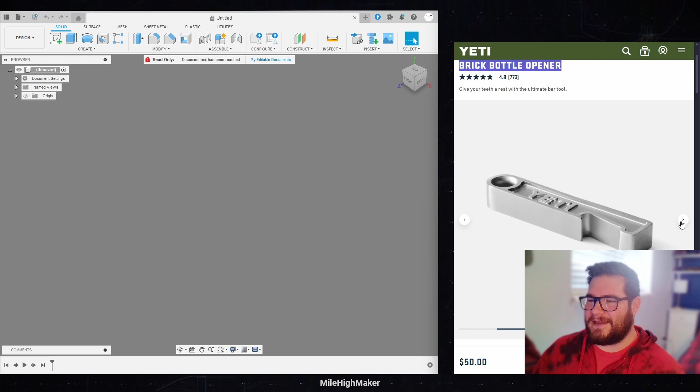All right, so here we are. I have found a Yeti brick bottle opener. Lovely name, by the way, I love that name. But look at that, it's a brick, this looks dope. I want this. Do I want to pay $50 for it?

I mean, kind of. Okay, so let's jump over into Fusion 360 and create our own custom things based off this. What we need to do is start by creating some parameters. I'm sure you can do this in other programs, but this is my process for Fusion that I've found works.

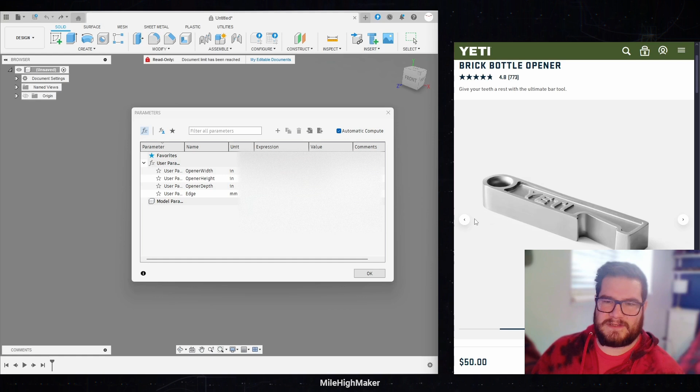So we're going to call this the opener width, and we're going to change that to inches. The other thing I want to add is this edge right here, so I'm going to call that edge, and we're just going to guess how many millimeters -- I think it's like 3-ish. Going to add that. There's also this cutout, this inset, which looks about the same size, so I'm going to use the edge value as the cutout depth. But I think that's pretty much what we need to start with for now.

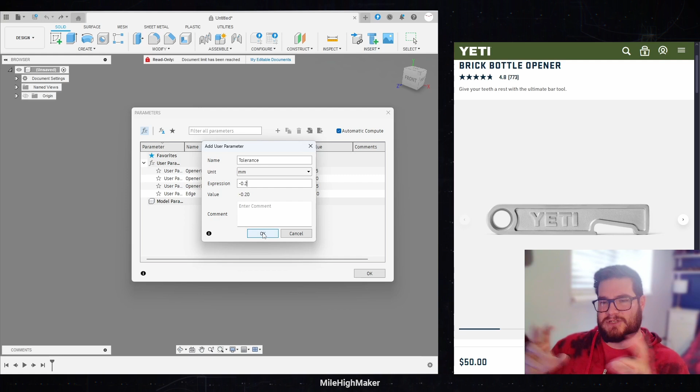I also like to add a tolerance, but for this one, the multi-material part, we'll get into tolerances later -- I'm actually going to do that in the slicer instead of here. Normally I'd like a tolerance of minus 0.2, so that way if I create something, I know I need to shrink it by 0.2 so that parts can fit together on my printer. So I'll usually add that to my parameters as well. But that is a good starting point.

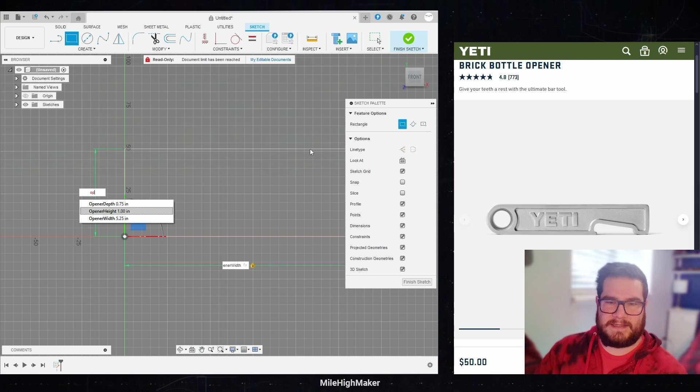All right, so let's go ahead and create a sketch. I'm going to put it on this face right here, the front face, just because that is what I find to be the print bed. When I bring my prints into Cura, that's where the print bed is going to be, and so we want to create this lying on the print bed. Let's give it a base sketch, basically just to get general parameters for our reference. And this would be the opener height. That side -- so that is where our stuff is going to live, everything inside of there.

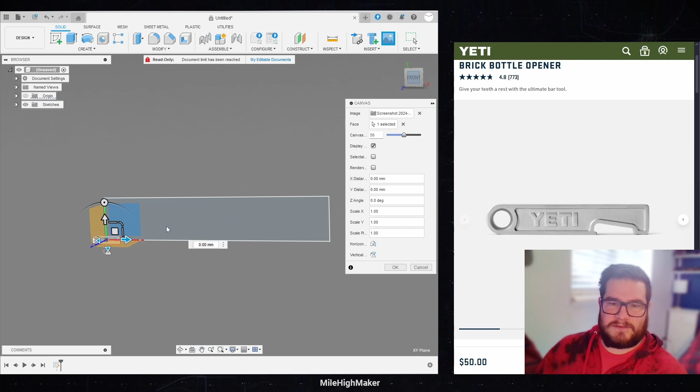And the first thing we're going to put in there after we finish the sketch is a canvas. This is basically just a screenshot of this, which I've already clipped out. So we're going to stick it on that same face -- you can click and hold to put it on that face right there. And we're going to scale it until it fits right inside the rectangle. That image is a little hard to see, but we're going to work with it. It's about where it wants to live.

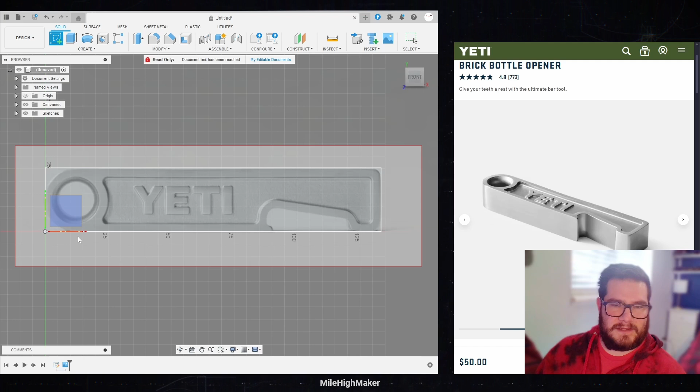All right, so we can start designing our stuff. I'm going to create another sketch. That's basically just how we can set up general parameters so we have somewhere to work with in the correct dimensions. So that rectangle is there for the picture, then everything else is going to be our actual design. All right, so we created another sketch, we're going to put it on the XY plane, and move it over.

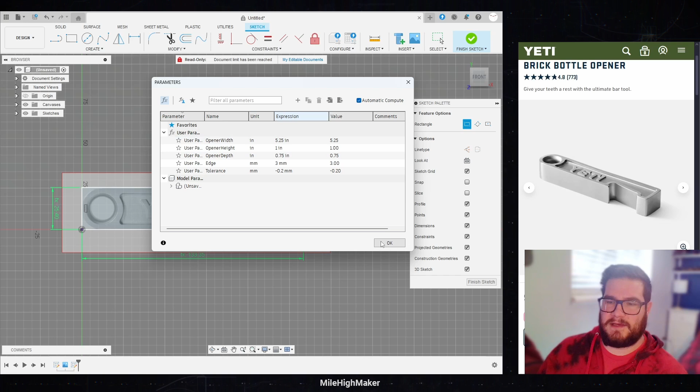Okay, there we go. All right, let's start creating another rectangle because that'll define most of our opener. So this would be the opener width, and then you can tab for the opener height. And so that is referencing our parameters, pulling these numbers. It's handy to have these because if I wanted to make this a much longer opener, it would automatically update over here, and everything that's constrained will actually follow unless it's broken. But we're not going to worry about that right now.

So we're just going to create a circle, which is going to be this back edge right here. And what I like doing is tangenting that to my edges, so that way this will always follow the size of your square. All right, so let's get this angle right here. It looks like it's pointing basically where this edge meets the wall, that's where this angle is going to go, or start anyway.

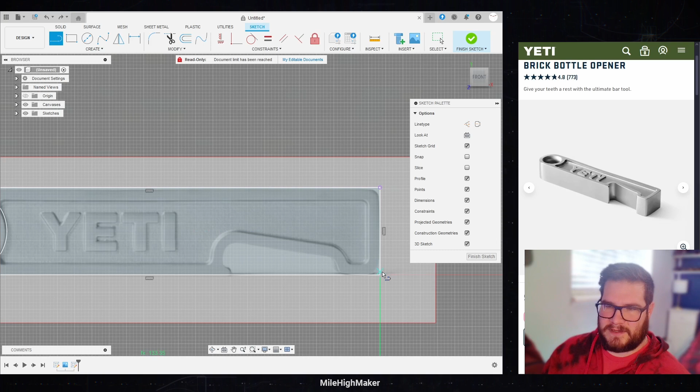So we're going to make that an edge height. And this isn't going to be a Fusion tutorial, so follow along as best you can if you're in Fusion or another program.

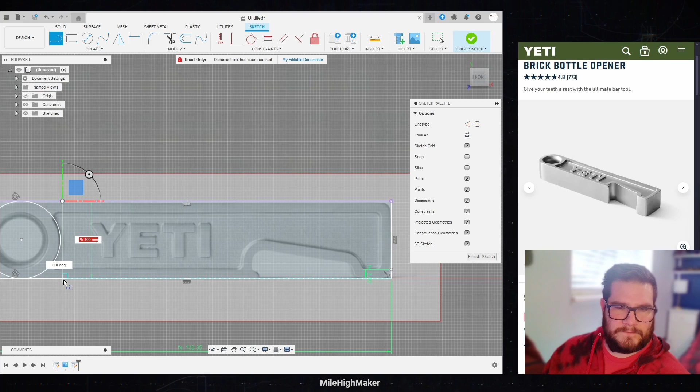But if you're an expert, you already know what I'm doing. Another thing I'm going to do is, where is it going to end? It looks like it's going pretty much the same place, but over here let's see, we're going to do something. It doesn't have to be perfect because we can change it how we like, but I'm going to tangent that circle. So basically, we're going to have the edge corner right here be the endpoint for our curve. There we go, and that's pretty close.

I'm good with that, and then it looks like it ends somewhere around here. So this will probably just be a sketched dimension at a set size. It doesn't have to be perfect. Let's make it like a 13. 13 shows up in so many designs I find, like the number 13. Plus it's like a dope number, so one of my favorite ones anyway. Not that you needed to know that, but we're going to do that. And we're going to set this dimension.

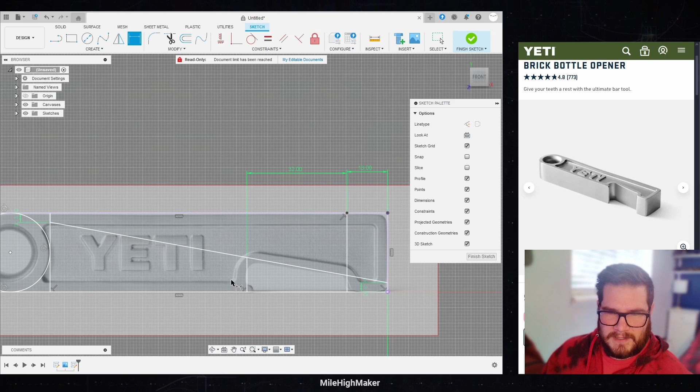And I have already looked up what a bottle cap is. Like the dimensions of a bottle cap is about 32 millimeters. So we're going to set that to 32 millimeters. And you can see that little lip right here. That doesn't quite go up as high as this, but we can make it do that. So that, create that little bump out there. We'll tangent it to that corner.

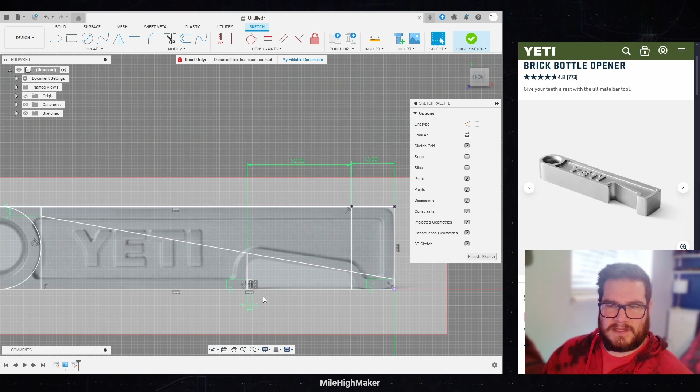Do edge divided by 2, edge divided by 2. Okay, looks like it might need a little more, just edge height. So that way, in a later process, when we start getting this part right here, this little outer groove, we can actually match it up to that.

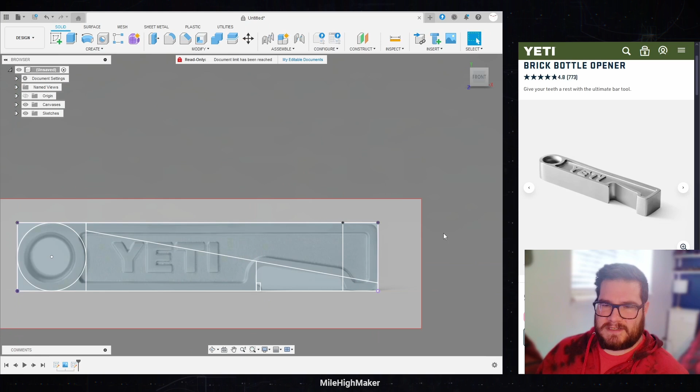So I think that's pretty much it to start with. That looks pretty good, we can start from here. We can start extruding and beveling and chamfering to our heart's content. All right, so let's finish that because we have that little cutout and we have that whole thing, and we can always poke a hole.

Cool, we are ready to start extruding. Let's look for a different view. I've hidden our first sketch, and let's start extruding. Let's see, we don't need those bits, but we need pretty much everything else. So you can select everything, but we can also just click and drag and say no thank you to those bits and no thank you to that bit.

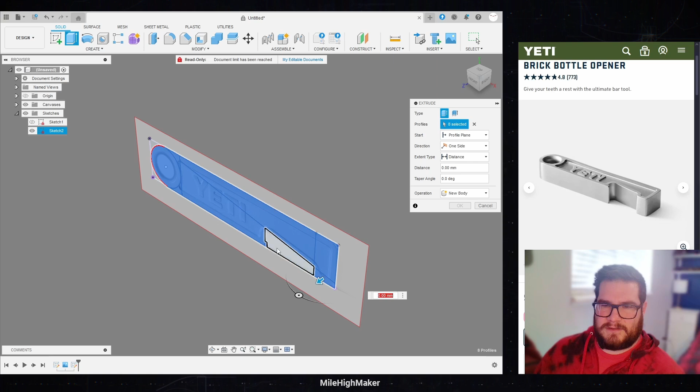Cool, and the depth of this is 0.75, but we're going to half that because later we're going to mirror the groove so I don't have to do as much work. Alrighty, so I'm going to bring that sketch back up.

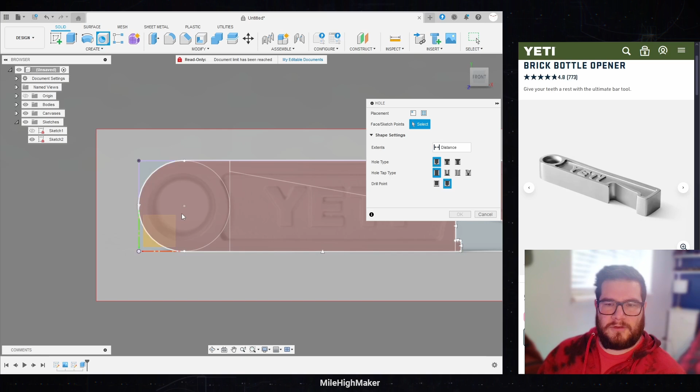Okay, so let's now poke that hole right there. So we're going to create a hole. We're going to say it's in the middle of that sketch. Let's say it is the height minus the edge. There we go. Yes, so that's the hole size I want.

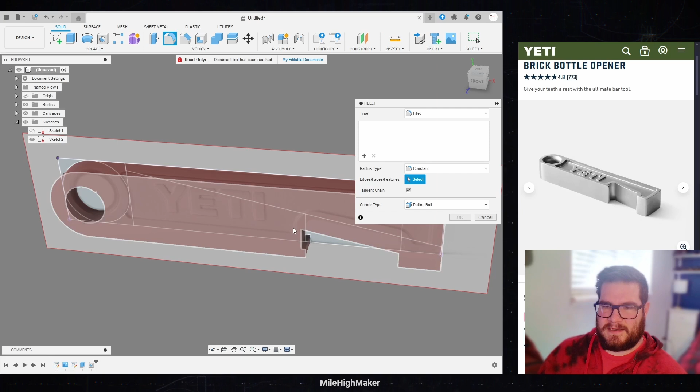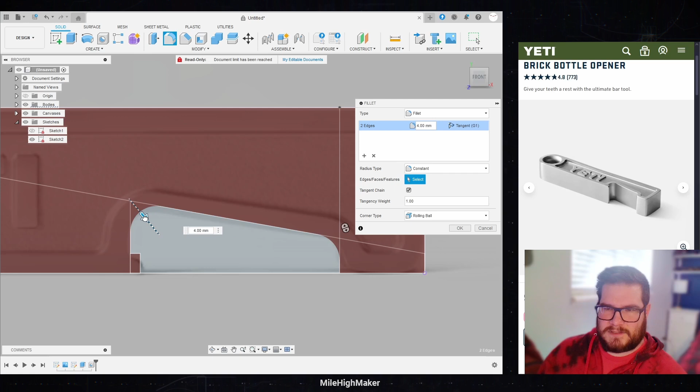Cool, okay, so now let's create some fillets to get that nice curve here in the bottle opener section. All right, and this one's kind of cool, actually. I'm going to start here and here on those corners. Stop it, there, on those corners. And we can start dragging to kind of try to match that edge. It's too much, about a 4.5, no, too much. Here we go, 4, yes, that's a nice curve.

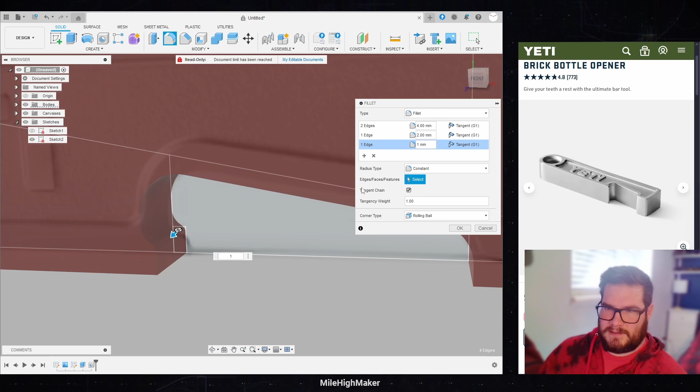Let's add another one. And what I found is actually as you go down this edge, they started with a 4, and then it goes to like a 2, and then it goes to a 1, and then it goes to a half. So they halved the curve every time. Let's see if we can see that a little better, hidden edges.

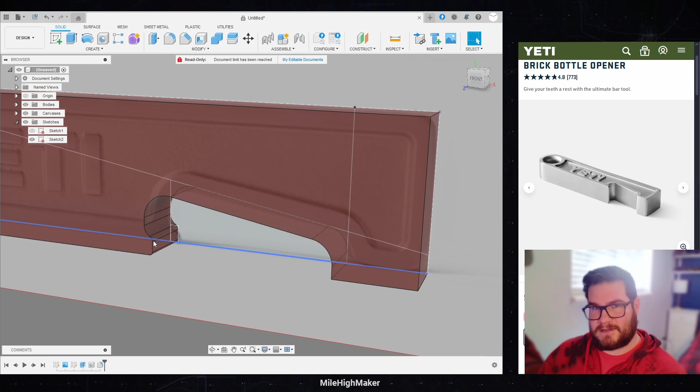That looks really nice, they halve that curve every time, and that looks really cool. So that's something I'm going to take into some of my next programs, my next models, is taking those rules where, oh, start with a big curve, halve it for the next curve, halve it for the next curve, halve it for the next curve. So as you can see, we've started here, 4, 2, 1, half. That's pretty nice, good job designers. So since that one's a 4, I'm going to add one, hit Control, add that corner to the 2.

And we're also going to do it to these ones as well. I think those are also 2s. Yeah, those are some nice 2s. Good, good. That looks beautiful. I'm going to hide that sketch. We're going to hide the canvas for now, because I think from now, we're just going to kind of eyeball it, because that looks sweet.

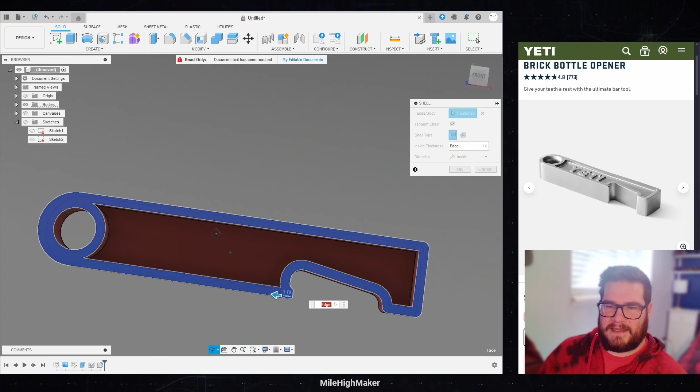All right, so now we can start creating a shell, because we want that edge around here. And that edge, we'll just type in the edge. Oh, look at that. We're already looking great. It's a little deep, but that looks really nice. Okay, so, yep, we're on it on the inside. Just leave it as is.

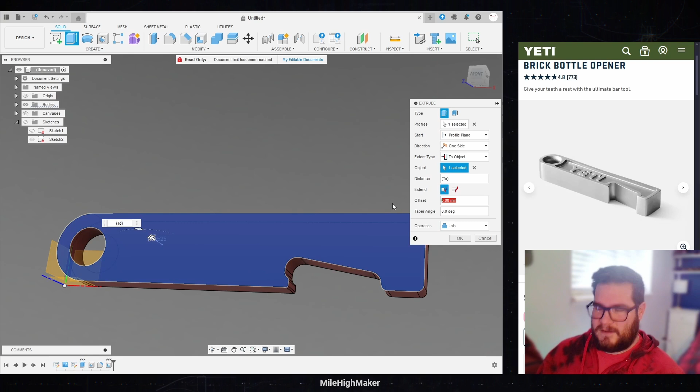Okay, so now to fix this back to the height we want to extrude this lower plane down here. And we want it to be a specific distance from that top face. So we're going to go to an object, say this top face, and the offset is going to be minus the edge. So now your edge height is exactly the depth of that. And we're going to say join. Yep. Great. So that is half of our model right there.

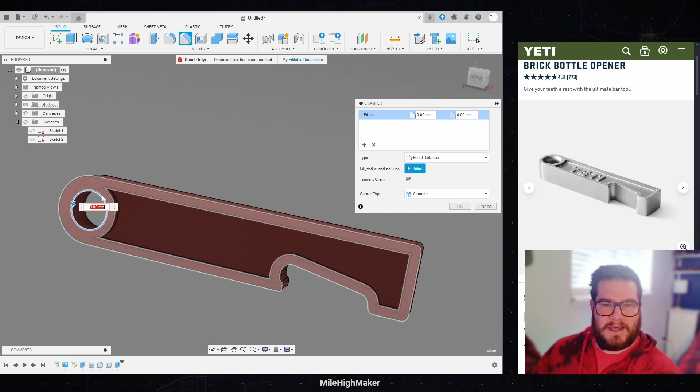And we can do some extra fun stuff. You can see there's a chamfer and a bevel over here. So we're going to add both of those right now. So we're going to start with the chamfer. I would say let's do edge. Let's see. That might actually be a little deep. Let's do edge divided by 2. Yeah, that looks...

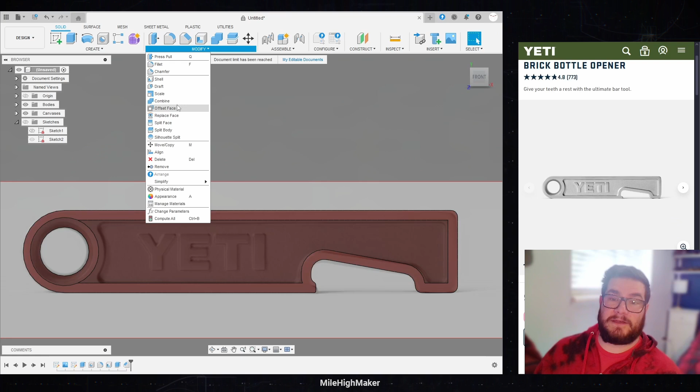All right, cool. But I don't like this right here. I think we need to make a thicker edge. Let's bring our canvas back up. Yeah, it looks like the edge could be a little thicker. So this is why we set up parameters, because we just change the parameter. Say our edge is now going to be 4 mils. Awesome. I'm going to change that to actually be half an edge.

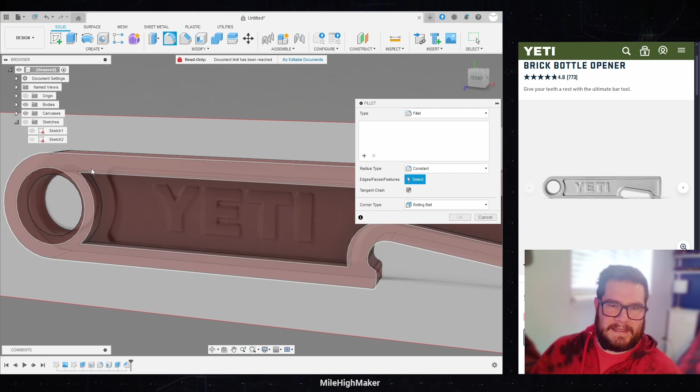Yeah. Okay. We also need to get this inner curve right here. You can see on the canvas those inner curves. So let's create another fillet. Select all those harsh corners. Nice, nice, nice. And let's see. It's probably going to be a 1, or it might be a 2.

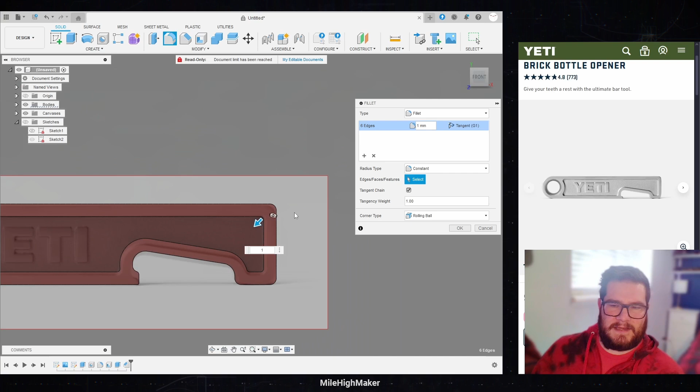Looks like a 1.5, but I think we're going to make it a 2. No, we'll make it a 1. Yeah, we'll make it a 1. I like that. Make it a 1 mm, because we had the 2 on the outside. Half of that is a 1. We're learning. This one, ooh, I might change that one. So let's change that one to be a 2.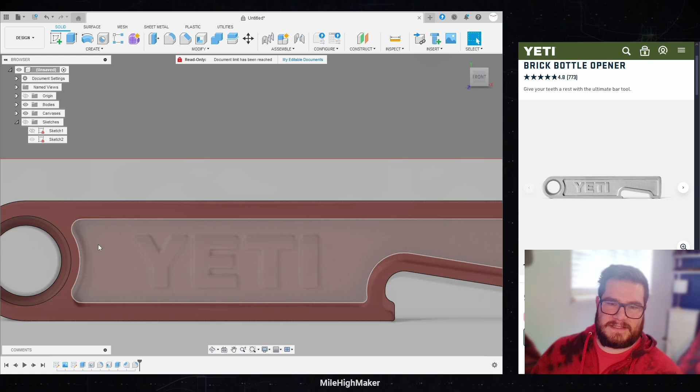So we'll unselect those. I'm hitting Control to unselect. We'll add another selection. Click those 2. We'll say it's 2. I mean, we could set up parameters for multipliers and just multiply it by something, but I think I want a sharper curve in here than they have, and about the same right here. I like it. Cool. We can move on from there.

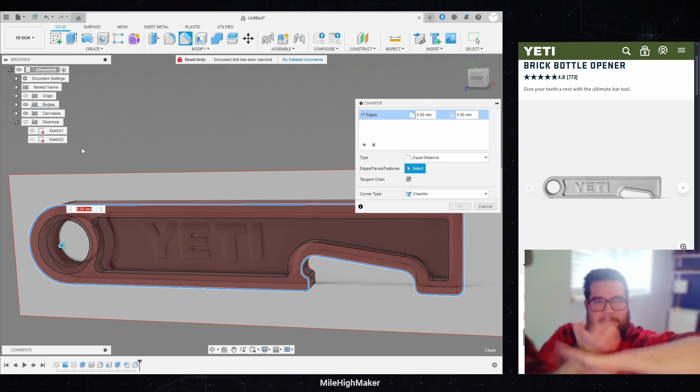Let's create another chamfer over here, because when you are printing stuff, this is also going to be on the back side. You don't want to have a bevel that's sitting on your build plate, because that soft curve is going to look terrible and chewy. So you want to start with a chamfer and then bevel that. So we're going to do that. So a chamfer, then bevel.

So let's see. We'll take our rule of halves. We'll start with that 0.5, because we had 1s, and we're going to do it half. Might as well. And we'll give it to this side as well. Or actually, we're not going to do it to this side, because I want to set this up as a multi-material print. And so I'm going to stick something in there after I've customized the name. So that'll be something we'll work on later.

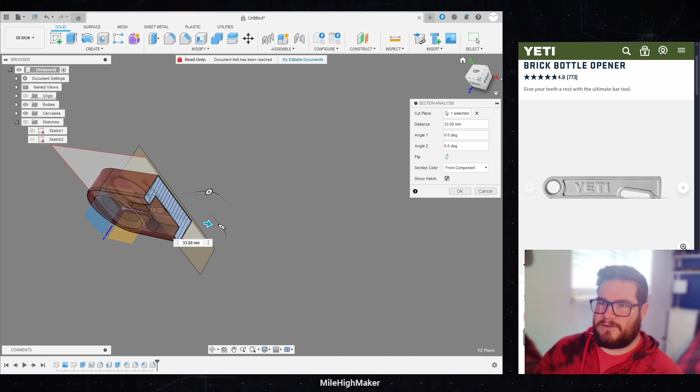So let's give it a fillet. And do here. And we're going to give that another 0.5 millimeters. I don't want that. 1? Yes, 1's good. Cool. So we'll finish that. Let's do an inspect, and we'll do a section analysis, so that way we can see exactly what that is doing for us. So look at that. So that's going on the build plate, and then you chamfer it and then fillet it.

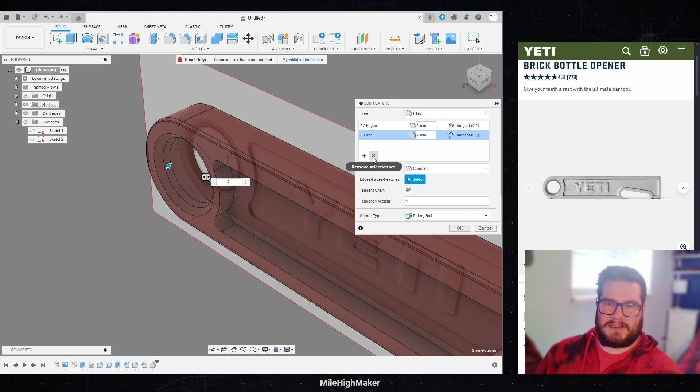Looks good. So that way it doesn't have a soft overhang that gets messed up. Cool. All right, back over here. Let's bring this up again. We'll add another fillet right here. Is that a 1? Oh, that looks like a 2. That's a good 2. Cool. So I guess we're sticking with 4s, 2s, 1s, and halves millimeters.

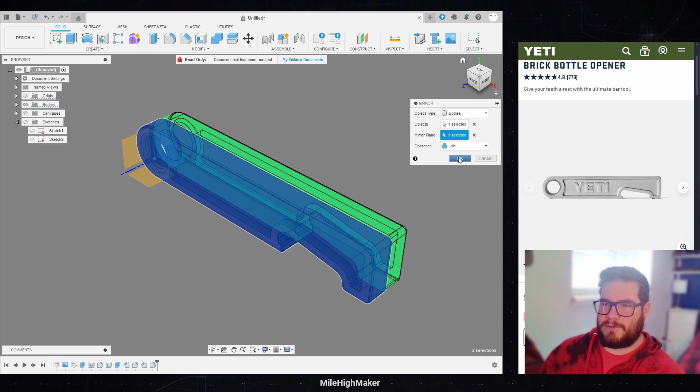The millimeter dimensions. All right, so now let's create the mirror of this, because this is pretty much done to this point. Don't need the canvas. Let's create a mirror of this body. The mirror plane is going to be click and hold the XY plane. Oh, look at that. Yes, we want to join it. Oh, yeah, that looks great. We could be done here, but we're not going to be. We're going to make it even spicier because this is getting good.

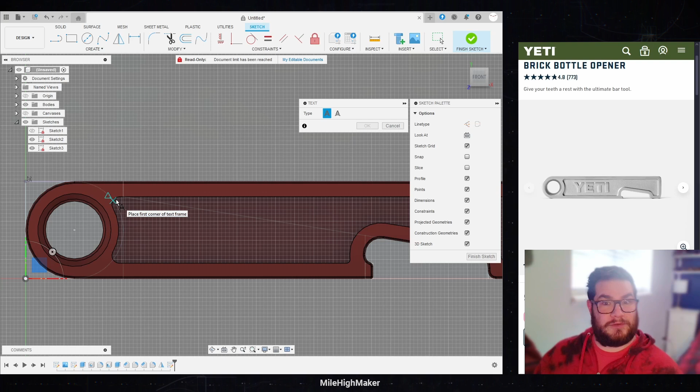All right, I clicked extrude. I want to create a sketch here. And this is where we're going to do our customization. So let's customize this because I want this for me. Y'all got to make your own, okay? But anyway, we're going to snap it to the middle of this curve. I'm not clicking and dragging, just click once, snap to the middle of that curve. So that way I can do it in exactly the same place on the other side.

So I'm going to say MHM for MileHighMaker. And Arial Black, I have found, I've already done this before, can you tell? Arial Black looks pretty close to that. You can do whatever you want, but make sure that this can print well. Whatever text you're going to put on, you need it to print well. And you're going to have stuff that goes over it if you want multi-material, stuff that goes around it. So I'll show you how to set that up, but make sure whatever letters you put on here, like if you do 3 letters, nice and chunky. You can do someone's initials.

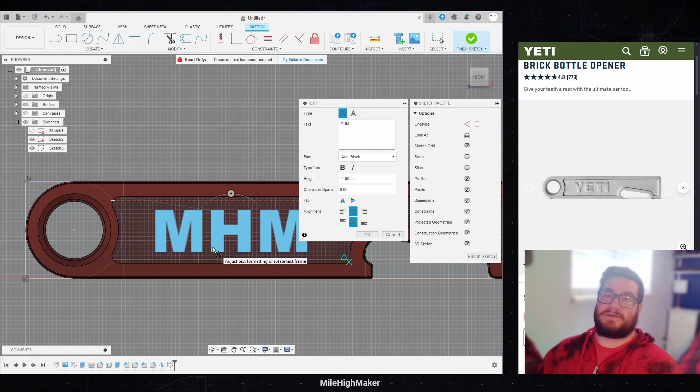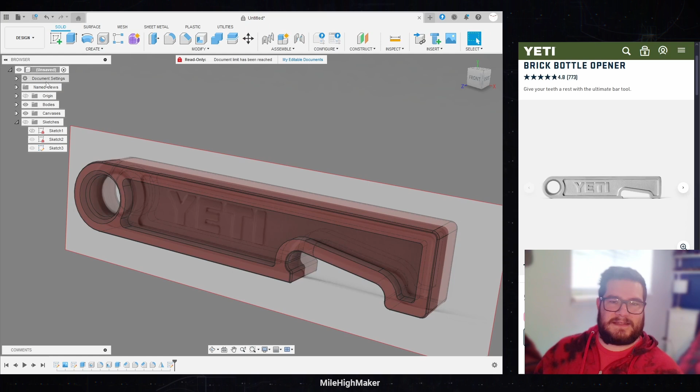This will be great. Height 11 matched pretty well. Let's look at the canvas. You can kind of see the Yeti starting over there and ending over there. But yeah, that's basically good to go. We are ready to customize even further. All right, we are ready to go to the next step. Finish that sketch. Let us extrude our sketch. Show it up again, please. MHM, and we want it to go out to an object, which is this front face right there. Look at that. It looks good. Yes, join, please, and thank you.

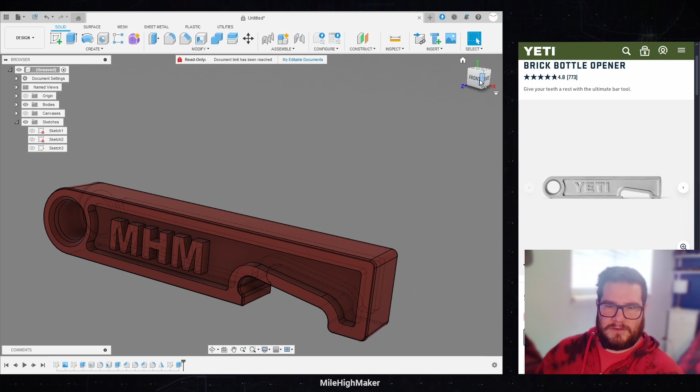Okay, we don't need that canvas anymore. Cool. Let's do this on the other side, because even though my logo is mirrored, your initials or whatever you put on here is probably not going to be a perfect mirror. So you're going to want another sketch doing the exact same thing on the other side. Whoops, not a sketch. I want text.

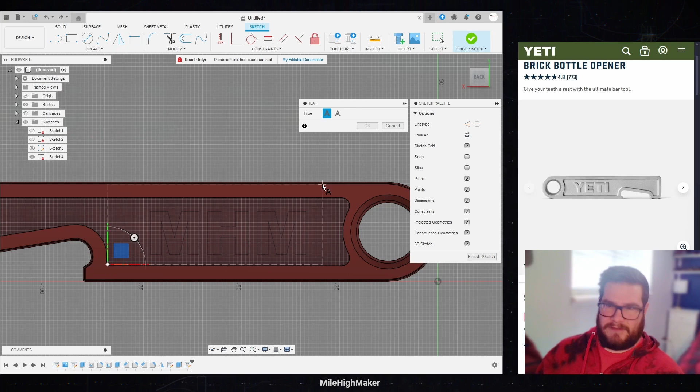There you go. I feel like my cadence has changed a bit. Getting a little more loose. Getting more used to this.

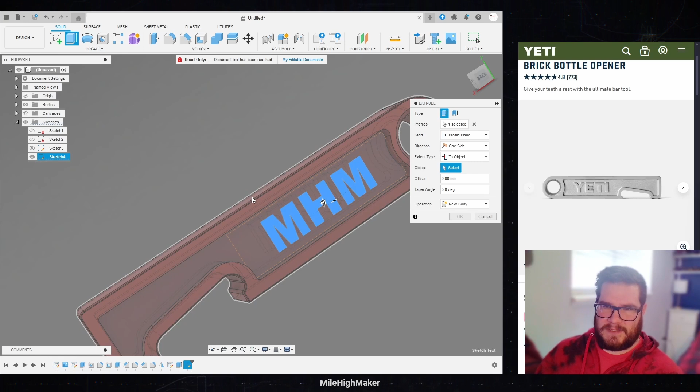I'm liking it. MHM. Yep, keeping all the same stuff in the center, in the middle. We're not flipping or nothing. Don't need to mess with the spacing. We are going to finish that sketch. And extrude. We don't want everything, just you, to an object, which will be this face. Oh, looky there, we're joining it. Beautiful. Let's look at just shaded with visible edges. Yeah, there we go. That is looking great.

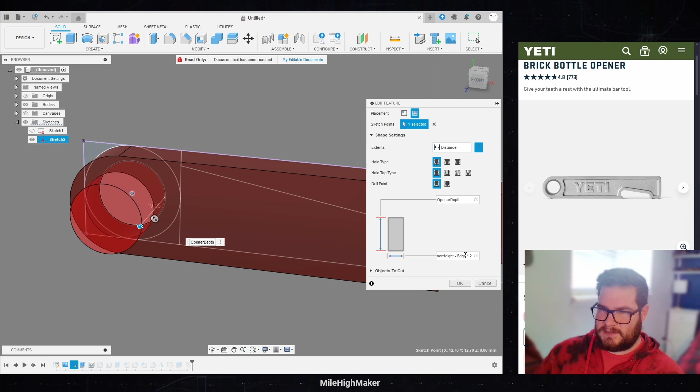Still looking a little funky. I think we need to add space for that chamfer. So let's double that. Or actually, let's triple that, because the chamfer is about half of that. So let's triple it. That's looking better, but I think we need to move the edge extra bit to a different spot. So stick that back to 2. And we can put that after our punch out. Grab a push pull. I'm going to make some extra space for that area, adding another edge thickness.

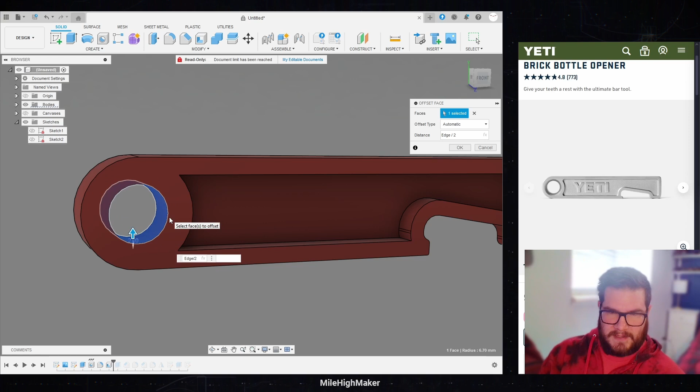Okay, cool. Let's see how that looks. All the way down. All the way down. That is looking much more even. Yes, now we're looking even. Okay, back to cooking with grease.

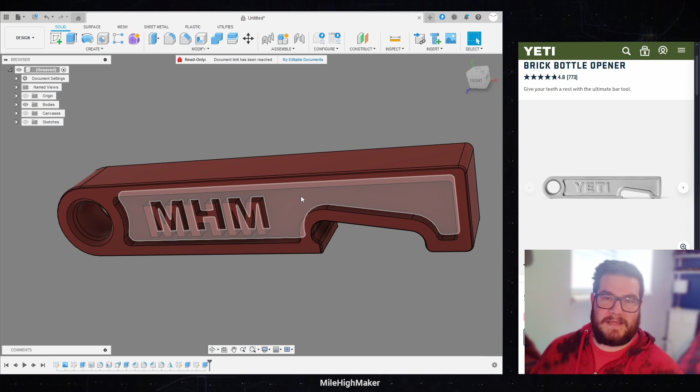Okay, so now let's create the insets. That's going to go right in here. And as you can see with the highlighted thing, this is a great place to start from. But before we get there, and as you can see by the highlight area, it's going to go right in that section, but we need to round off some of these corners because 3D printers do not create sharp corners very well, if at all.

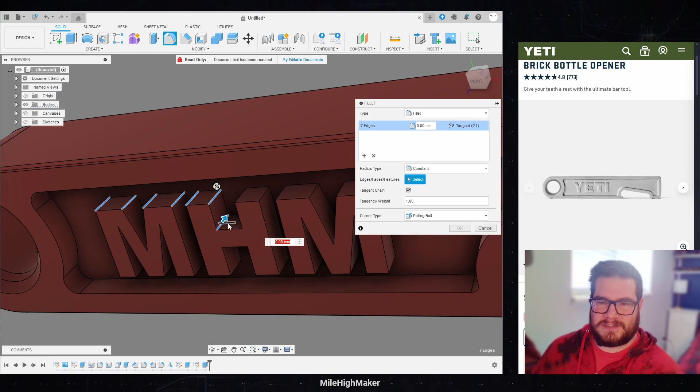So we've got to go through each letter and we're going to fillet each letter. And I think I'm going to fillet the inside corners a little different. These ones are going to be pretty sharp, so I'm going to fillet those differently than all these outer harsh corners. So we're going to select all those. All right, we're going to skip ahead because you don't need to see me clicking on everything. Okay, so we've selected all the corners on each half of this.

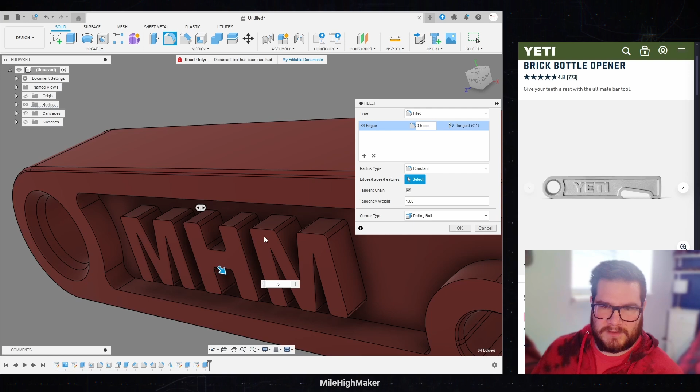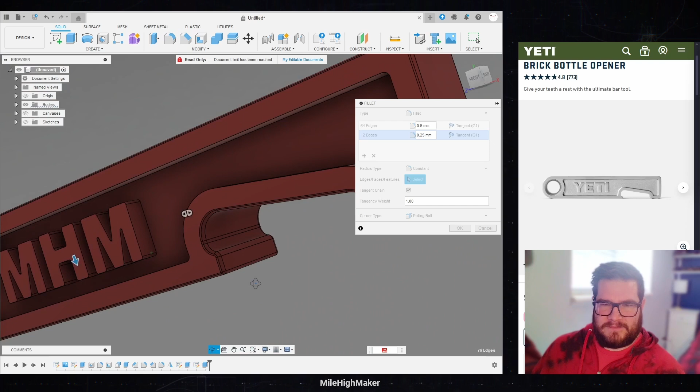And let's start with a millimeter. That's too much, so we're going to stick to our halves and our doubles, so that 0.5, 1, 2, and 4, but 0.5 looks great there. And I think we can just add some of these sharp ones as another half of that, so like a 0.25, because we're going for halves and doubles. Ooh, yes. Looks good. Okay, so let's add these points to it. Yes. Ooh. Yes. Look at that. That could definitely pass for some type of stamped metal.

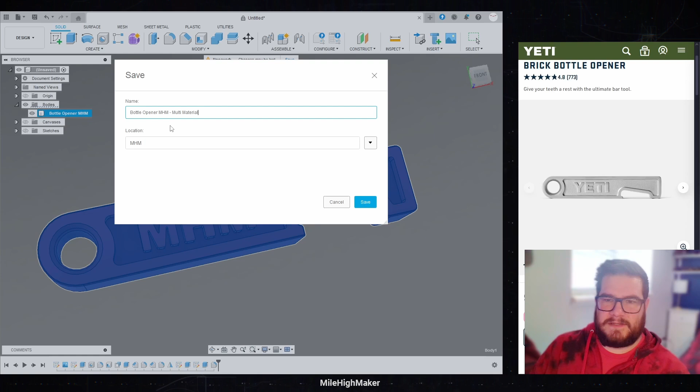Speaking of that, let's see how it looked like as metal. We'll finish that. We'll open our bodies. Let's actually rename it while we're here. Let's see. Cool. And let's also save this while we're here. Because if it crashes, that would be really bad and we would lose all of our beautiful work.

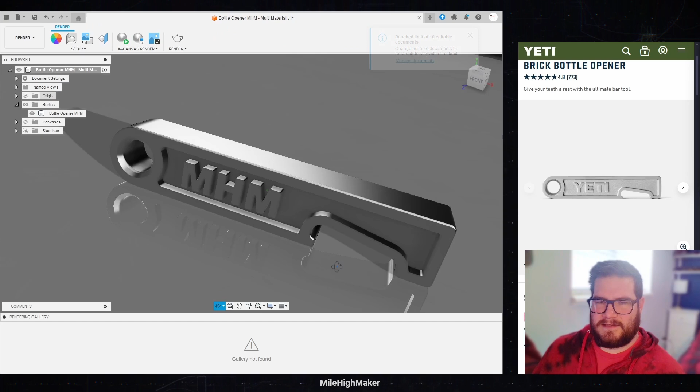Cool. All right, let's change the appearance of this. And let's look for, actually, let's look for steel. Nice satin would be good. Look at that. That looks great. Look at that. I could sell that right now. All right, let's get back to it.

Cool, because we're almost there, but we need to get that insert. Now we have all those rounded corners. Let's extrude to, yes, we want it to be a new body, to this outer face again. And it's not a join, it's a new body. There we go. And look at that. Now we have an insert right there, all by its lonesome.

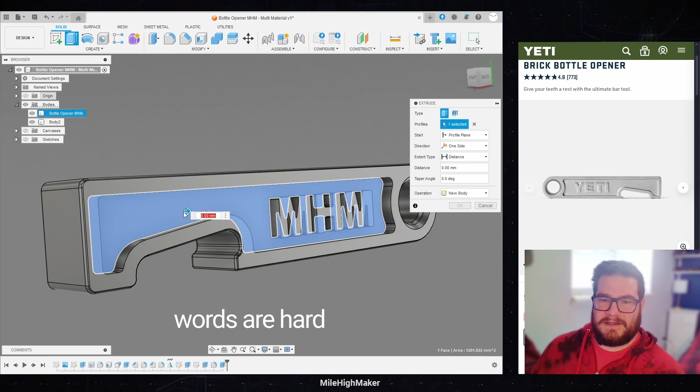Now we're not going to give it a tolerance, which normally I would do, because I'm actually going to show you how to do this in the slicer, and it's basically just a simple wall manipulation. And we're going to do this on the other side as well, because you're going to have to do it for your other side, especially if it's different letters. You're going to have to actually, you know, mirror that, because it's not going to be perfect unless you wanted two different textures on the one side, which, I mean, it could work, but we're going to do this way.

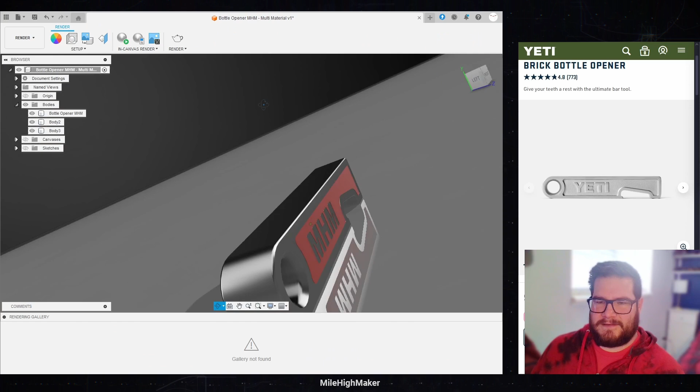All right, extrude that to an object. It's gonna be a new body. Yep, there we go. Look at that. That looks sweet. That looks really nice. Look at that. Probably making you dizzy. It's looking so good. All right, let's go back.

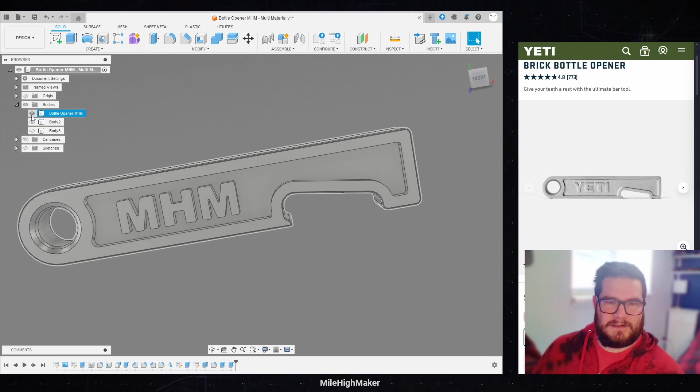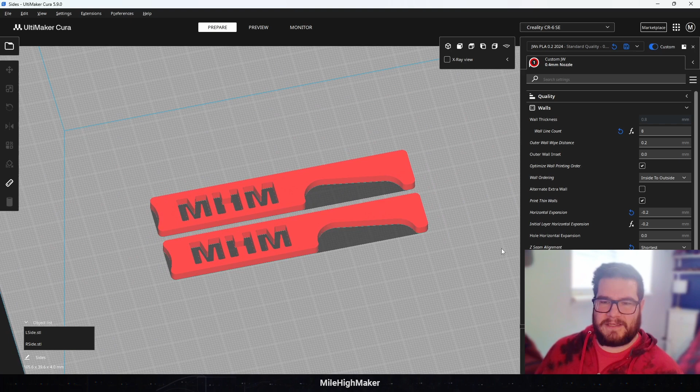Yep. All right, so I'm going to save these off, and then we're going to jump to Cura, and I'm going to show you how I slice it. All right, so here we are in Cura, and I already have these side pieces loaded up here. But what I am going to show you is how I slice this so that way the walls are a little shrunken in, even these bits right here, so that way you can actually have some tolerances and slide them into your print. So let's go to our preview, and you can see I've given it a horizontal expansion.

This is in your walls. If you don't see this, you can right click, or you can actually click on the settings right here. And you can see right here in your wall settings, you have horizontal expansion.

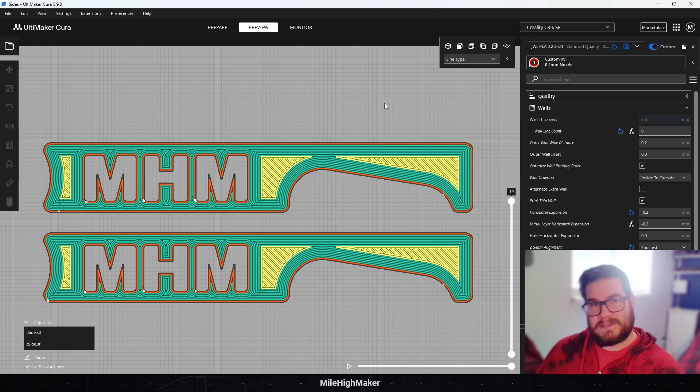Okay, so we have that set to a negative 0.2 because that is a good tolerance that I've found works with setting prints inside of other prints and fitting pieces together, moving parts. So you can see the shadow, this shadow right here is actually the original model. You can see right there. I know that's a bit visually jarring, but watch when I flip it. There you go. That print doesn't quite go there. It has that minus 0.2 expansion. It kind of starts breaking after like 0.3, but I mean, you can even make it bigger, but at this point, it doesn't make sense to do that.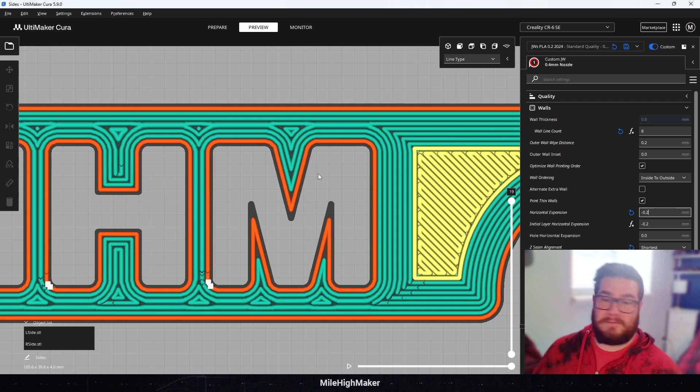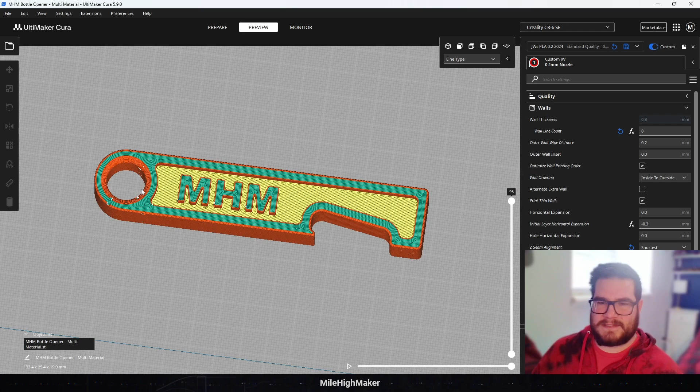And I've given this one some extra walls. You can see normally it's like 4, but we had it at 8 just because I wanted it to match my other one right here. So this is the rest of the bit we made. And so you can see that face that we built off of is right on the bed. We set that up correctly. We're not doing any supports, but you can see the walls here. I've given it 8 walls just to give it some extra strength. And you can see that goes all the way through, some dense infill.

But right here is what we need to set up. For multi-material stuff, we can actually pause it at the layer we want to inset our stuff. Let's see, go up, up, up, using arrow keys. So not that one. So after layer 20 is finished, before 21, we're actually going to add a script, and I've already added it here. So pause at height. So pause layer 20, so it'll complete 20.

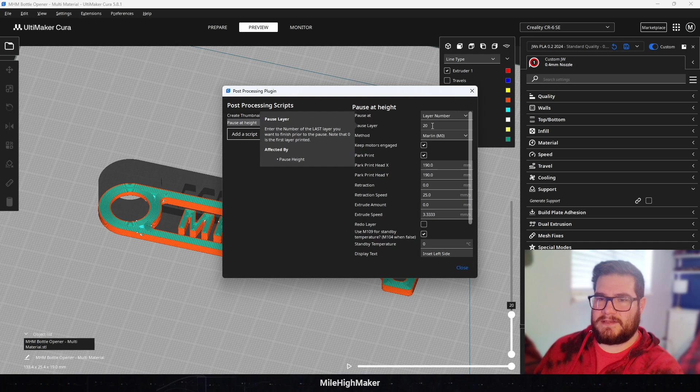Keep the motors engaged. You need to check that box. So that way when you start sticking stuff in your prints, it will actually keep the bed engaged and not just slop around. So you definitely want to keep those engaged. I set a display text of inset your left side because that's the side you're going to put in, and a beep length of 6 seconds. So we're going to do that, and I messed with something, so we're going to reslice that.

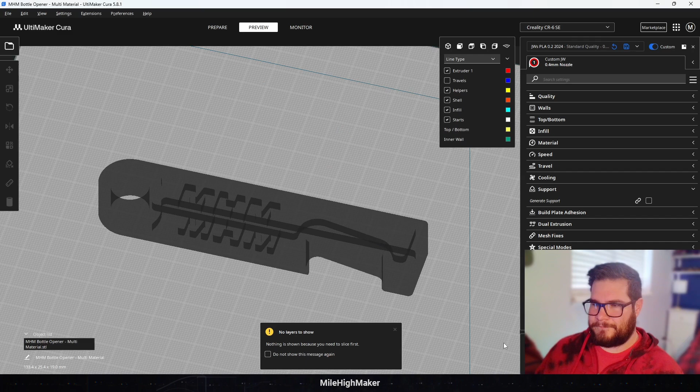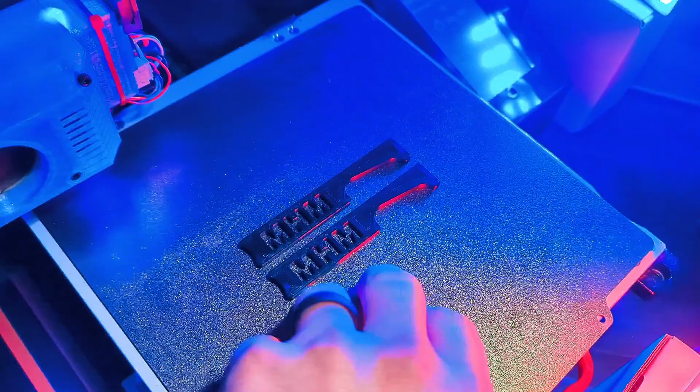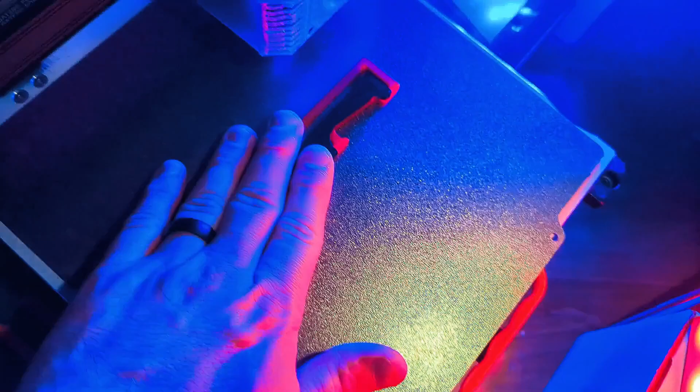And there we go. So once it hits there, you put your stuff in, and then you keep going, and it'll print the next layer, and it'll actually fuse those layers together. It'll fuse your inset piece to the rest of it because it's just going to go right on top. So that's very nice. You don't have to glue it in or anything, and you don't even have to use support materials because you're going to be sticking stuff there. And it'll go up, it'll finish the print, and then when this is done, I would actually glue something into the middle right here. So you're going to put some glue there, and then inset your next piece on top of all that. All right, let's go print it. Now, while you guys weren't looking, I actually went back and added some tolerance.